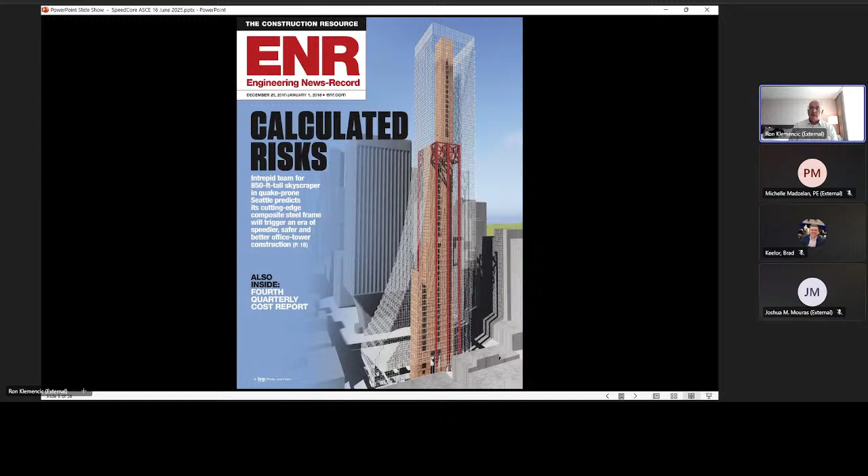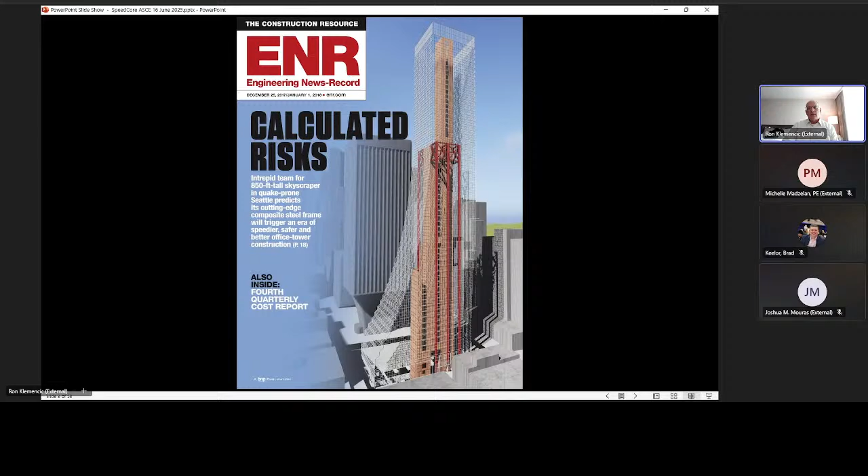So we came up with this idea of employing SpeedCore, a system never done before, never executed on a building before, especially at this scale. Engineering News Record got wind of that and wrote a very interesting article about new technology adoption in the AEC space and how reluctant we all are to adopt those things, entitled Calculated Risks.

The participants in this project: our ultimate client was Wright Runstad, the developer, who is a very prolific, highly regarded developer in Seattle. They've done many of Seattle's best buildings. NBBJ was the architect, and of course we were the engineers, and Lease Crutcher Lewis was the contractor.

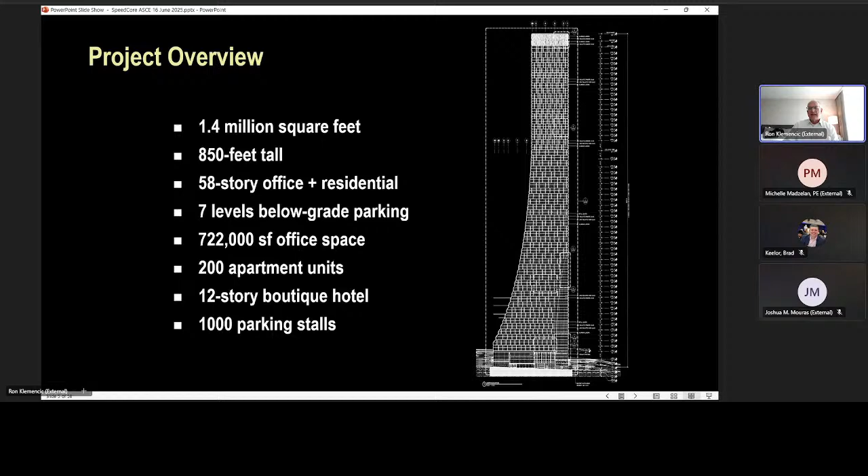Here's some of the stats about the building. What you'll note about the image on the right is it's a very slender tower, 850 feet tall, and what's not shown clearly here is we have, in addition, 7 levels below grade for 1,000 parking stalls. So it's a very massive building, taking up about 3/4 of a city block in downtown Seattle.

As I mentioned, the structural design was originally conceived as a reinforced concrete core. Here you see it colored in red. A very traditional core arrangement, the core in this case being 40 feet wide and 90 feet long, so 3 cells, 40 by 30, at its base.

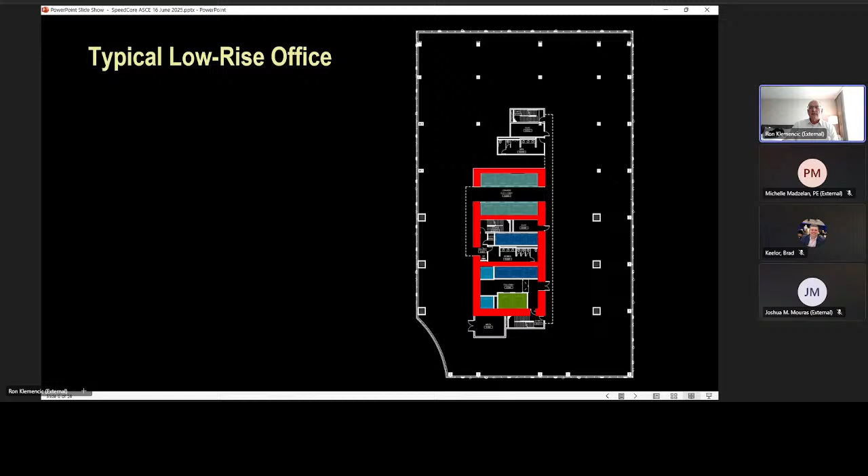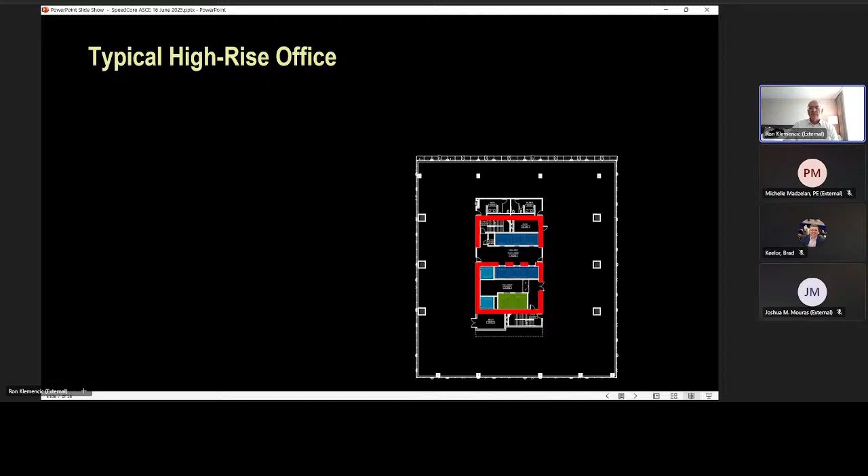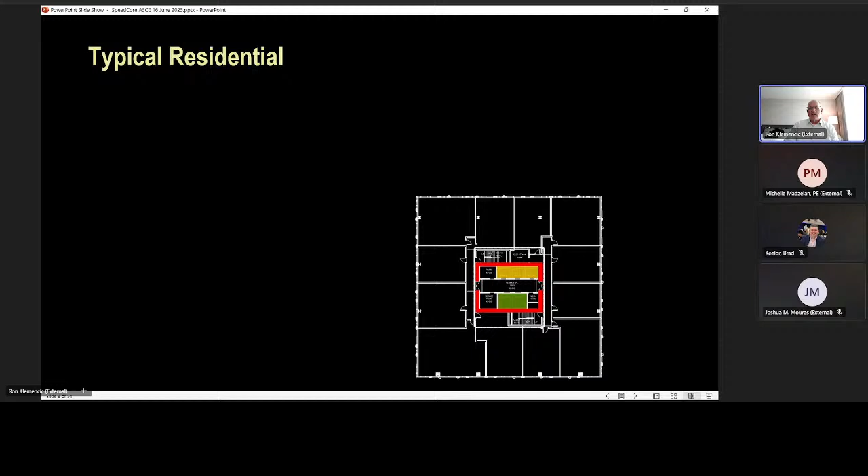As the tower goes up, the tower footprint gets smaller, and so also shrinks the core. Midway up the building, we're at 40 feet by 60 feet. And at the very top, where there are residential apartments, the core is reduced down to 40 feet by 30 feet. That's a very traditional layout for a structural bracing system for a tower of this height.

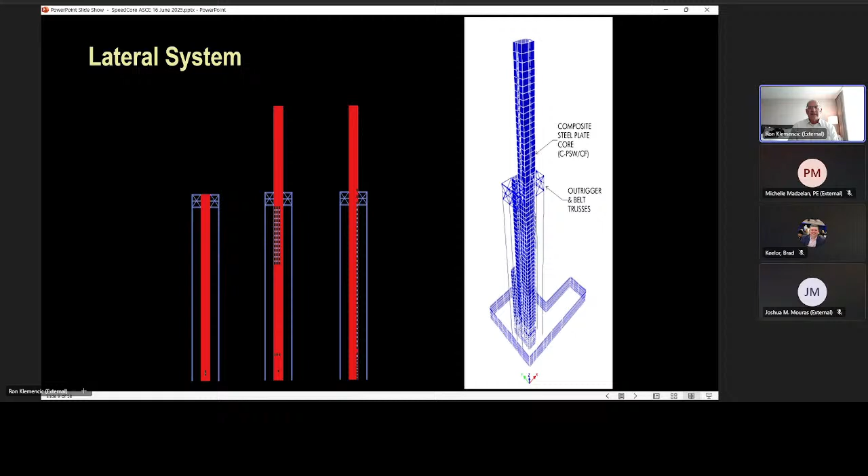But in addition, because of its slenderness, this tower also required a series of outrigger trusses and belt trusses located at a mechanical floor about 2/3 of the way up the building. In the case of Rainier Square, this mechanical floor delineated the differentiation between the office uses below and the residential uses above, so it was a very convenient place to locate these outriggers. That was the system originally conceived.

So the steel would overtake the reinforced concrete core very rapidly if the core is not well ahead of the steel erection. This was, in effect, the problem statement for us as we imagined another way to design and build the building: how can we squeeze this time lag out of the construction process? In the case of Rainier Square, that time lag was substantial, measured in months.

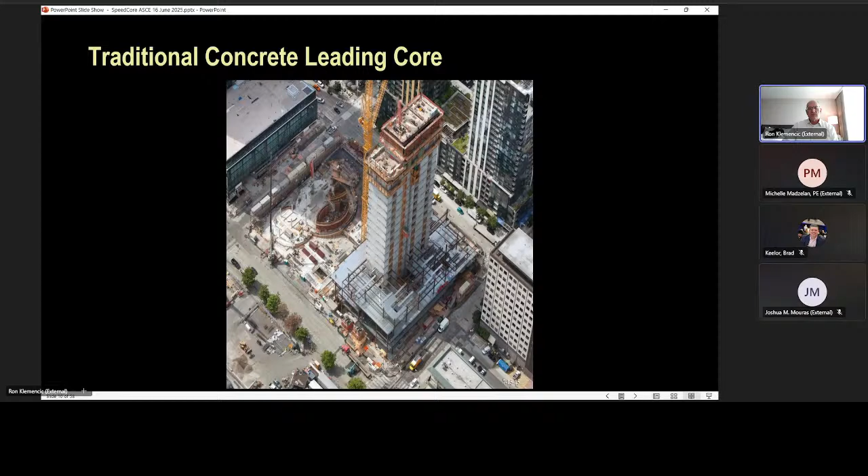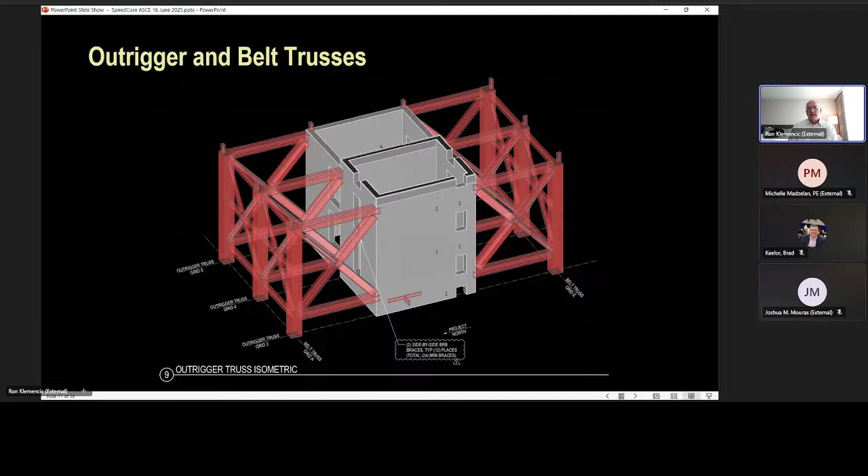Complicating it further were these mid-height mechanical floors with the outrigger trusses and belt trusses. The connectivity between those trusses back to the reinforced concrete core wall is very complicated, requiring very huge embedded steel shapes within the reinforced concrete, making that portion of construction very laborious, very costly, and slowing things down tremendously just at the 2/3 height of the building. So it was a further complicating factor.

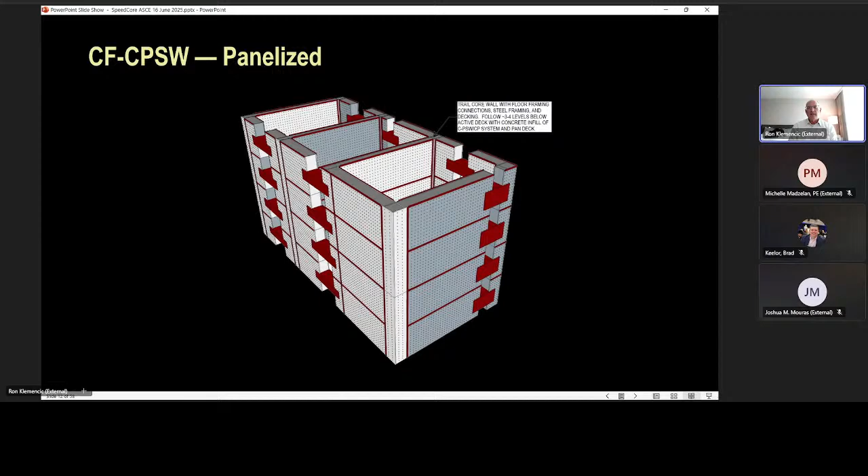That's where we introduced the idea of what was then called a concrete-filled composite plate shear wall, CFCPSW for short. Now, as AISC has named it, SpeedCore. Essentially it's a panelized, prefabricated steel sandwich panel that's prefabricated in a shop, trucked to the site, erected like giant Lego blocks, and then infilled with concrete in a trailing operation.

A typical panel looks something like this, where it's 1 story tall—in the case of Rainier Square, that being 14 feet—and 1 bay long, 30 feet to 40 feet long. So a typical rectangular panel looks something like this.

All the dots you see on the face of the steel plate are cross tie rods that interconnect the 2 steel face plates, and they serve many purposes. First, they serve as the stability for the prefabricated panel. Next, they resist the hydrostatic pressure of the concrete placed inside. Thirdly, they invoke composite action between the steel and the concrete. And lastly, they provide a confining pressure for the concrete under compression.

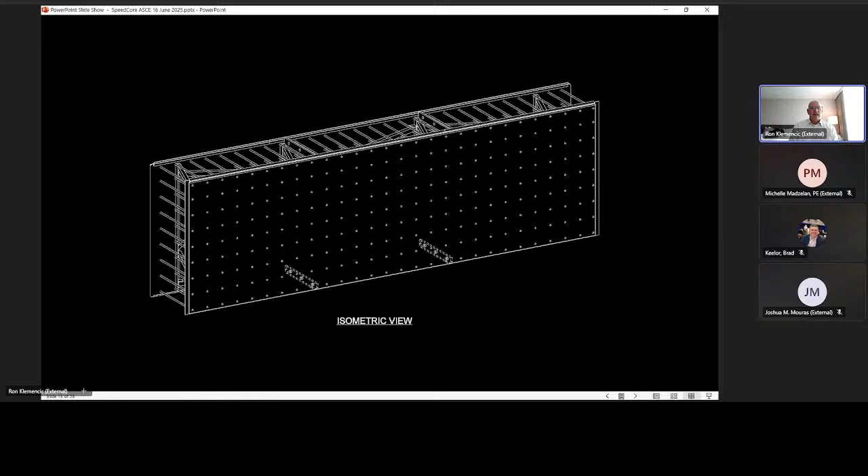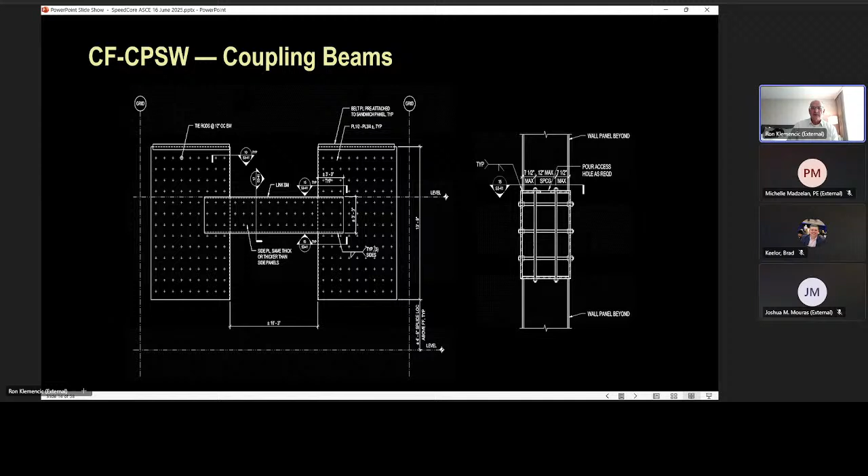These cross tie rods are very important to the overall system. There was a second type of typical panel we called the dog bone panel, or H-shaped panel, in which case typical coupling beams or link beams were also prefabricated in the shop to make these panels easily erected and to keep the detailed fabrication and assembly of the link beams in the shop and out of the field. That helped speed along construction.

The other detail that's really critical in thinking about this assembly is shown best in the right-hand image: the lower panel and upper panel are connected in the field, in this case with a weld, a multi-pass weld, which is a partial penetration weld with a reinforcing fillet. The design criteria for this weld was to develop the full tensile strength of the plate, since we were dealing with seismic forces and wanted to ensure that the connection itself was not the point of failure, but that any failure would be pushed into the plate itself. This is what was employed on the project.

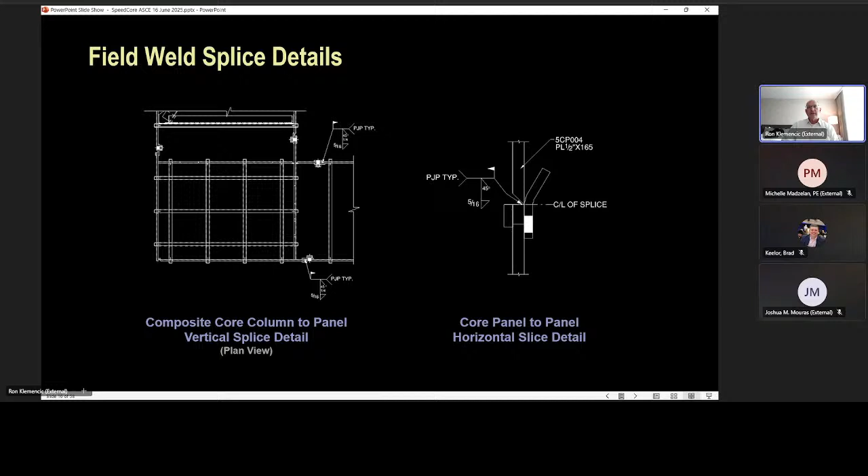We did provide the steel erector with a choice here. This is a system where you're able to bolt the field splices from panel to panel, or weld, and that choice was given to the erector. In the case of Rainier Square, the erector elected to go with welding, mainly due to the fact that they thought they'd have more flexibility and an easier time with fit-up in the field. Those are the two most critical details.

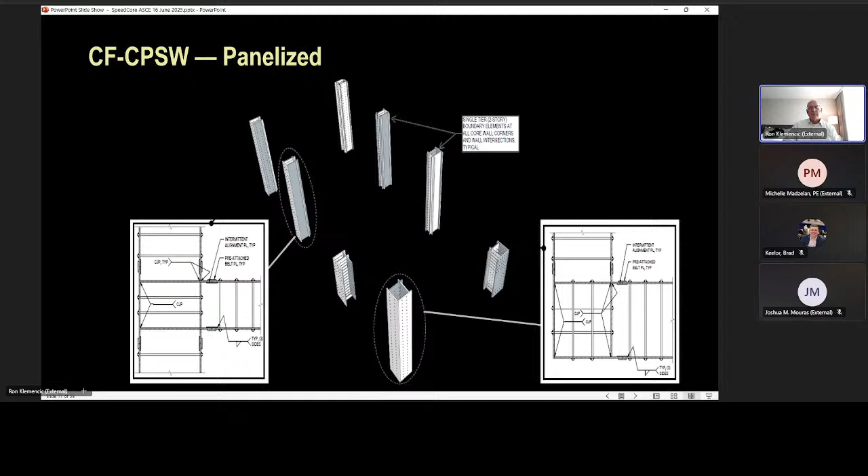There are plenty of others to think about. The erector was key in plotting out the strategy to put this together, and the erector brought to the table the idea of prefabricating corner columns, box shapes if you will, that were two stories tall, because erecting two-story tall box columns is something they've commonly done. They feel they can handle them readily, can plumb and true them easily, and then use those eight box columns as a framework to fly the very large wall panels in and use them more as a template. This was the strategy developed by the erector, which we then employed in the design.

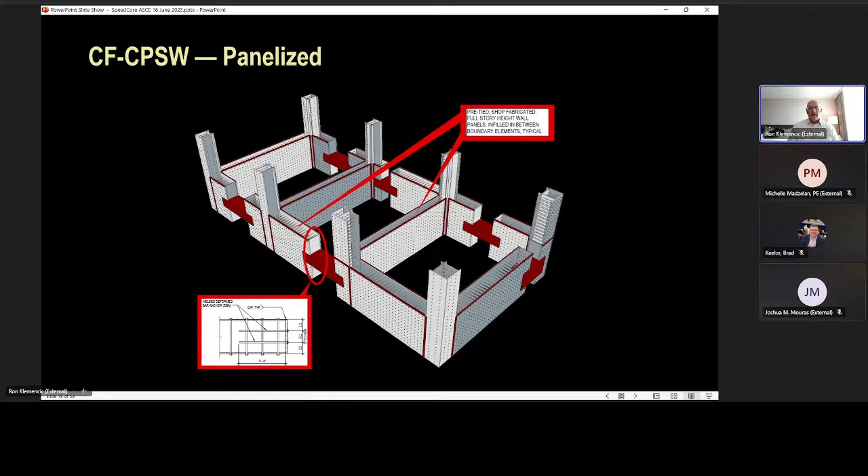Here's a bit of how it looks as it goes together. The eight box columns you see, and then the different panel types, both with and without the coupling beams, the red colored pieces being those coupling beams. The coupling beams in this image look like they're in an odd location, but if you can imagine, they are in the typical location at the head of a wall opening. The field splice was located approximately four feet above the top of deck, making it very easy for the steel erectors to make that field splice at hip height as opposed to overhead or at foot level.

I'll back up a step or two. About 10 years before we started the design of Rainier Square, a research project was undertaken, led by Purdue University, but funded by the Charles Pankow Foundation and the Magnusson Klemencic Associates Foundation. We first started working with Professors Bowman and Kreger in the Bowen Lab at Purdue University to test this assembly of prefabricated panels under a variety of loading conditions.

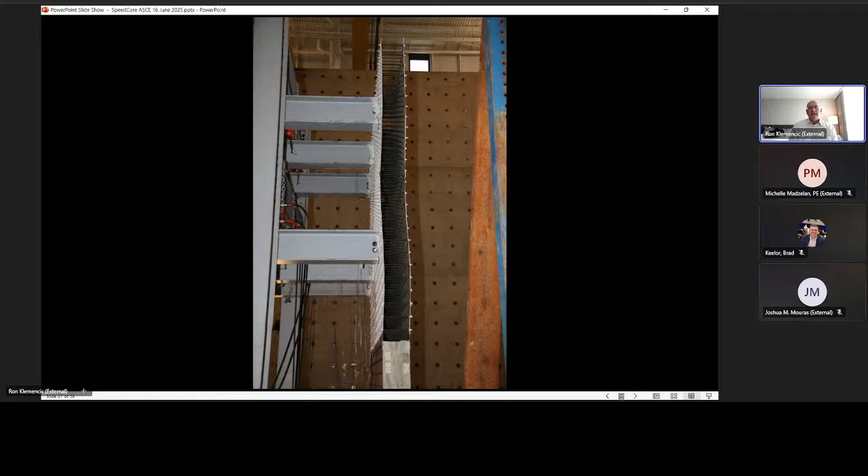In this image, you see a 5-story tall T-shaped section filled with concrete that was then tested for seismic loading. But we went through a whole series of tests, not only of the concreted panels for seismic loading, but in this case, an unconcreted panel, seeking to understand how much load we can put on this panel before we must put concrete in it.

The idea was to erect the panels quickly, speeding construction along as rapidly as possible, and only place the concrete inside of it when necessary. So understanding how much temporary load these panels could take was very critical in terms of realizing the time savings.

Here, if you're looking carefully, you can see the wall panel has actually buckled, and that was the point of this test: to understand when we achieve or initiate buckling in the wall panel due to applied load. This sets limits on the design of the panel and how far behind the concreting operation it can trail.

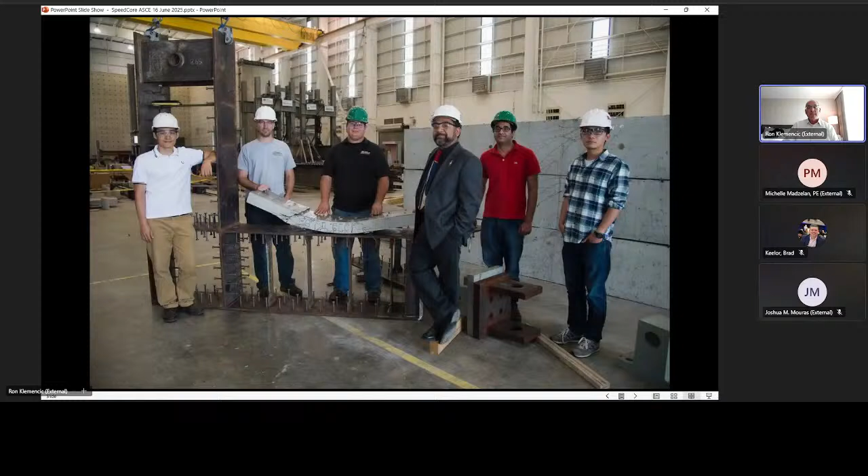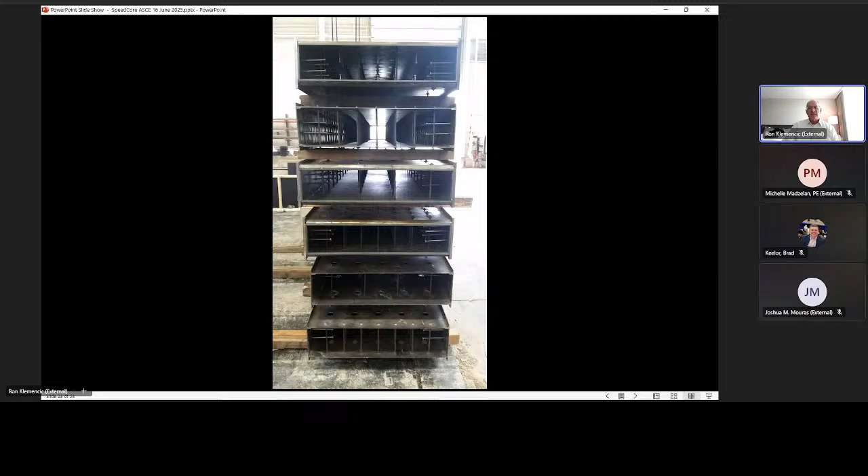A few years later, we extended our research work at Purdue University with Amit Varma and his team, looking at a variety of other details of this assembly—in this case, different ways to connect the cross tie rods and what those cross ties are made out of. Are they in fact cross ties, headed studs, or some combination thereof? We tested numerous configurations of panel assemblies.

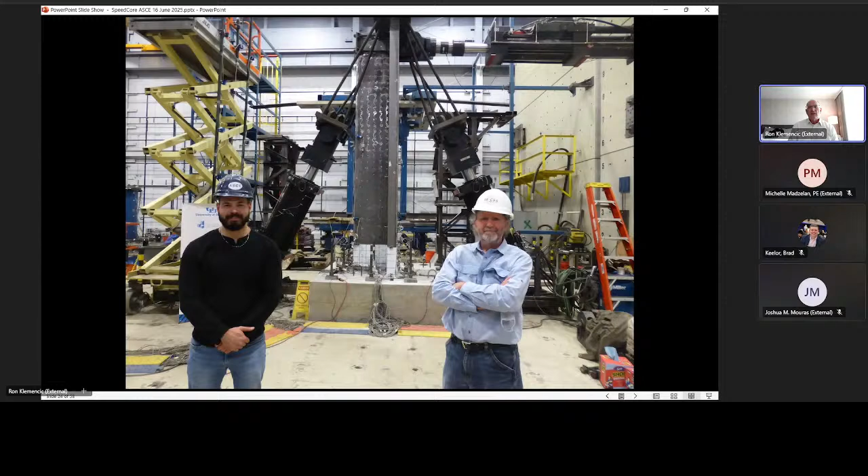In parallel, we had a separate team at SUNY Buffalo, led by Michel Bruneau and his team, looking at a variety of other conditions on these wall panels. In the background you see a T-shaped wall that was subjected to biaxial bending.

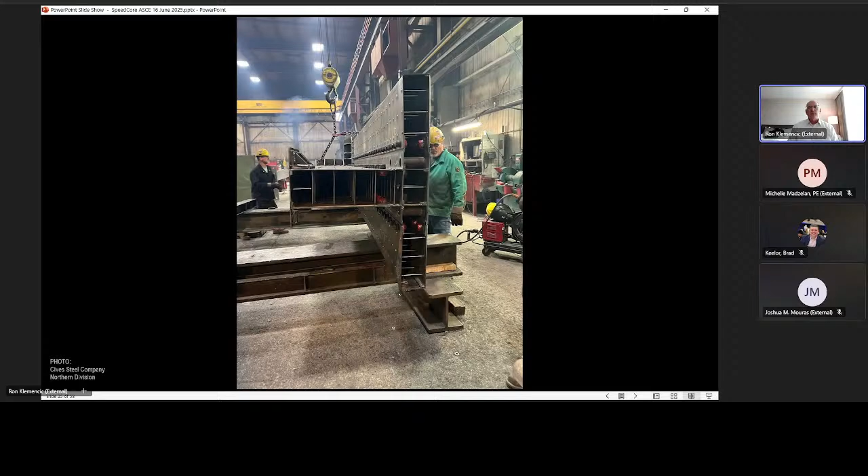In addition, Michel Bruneau's team at Buffalo tested bolted field splices. Here you see, leaning on its side, a T-shaped section with bolted splices. We were also testing the ability to bolt these splices, in addition to welding them, to prove out a variety of bolting methods.

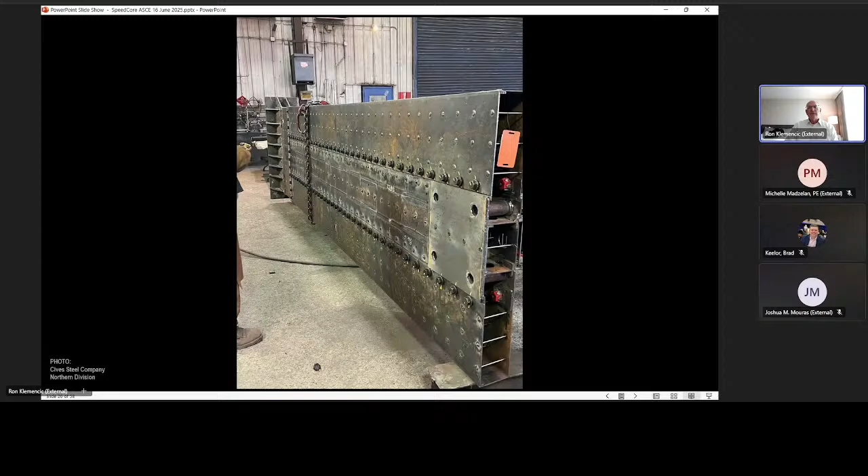Complementing all this in-laboratory research, which started some 10 years before we actually designed Rainier Square, when we got to the design, we—the owner, the constructors, the erectors, all the project participants—felt it would be really useful to build a full-scale mock-up of a portion of the core to understand how to go about building it prior to game time.

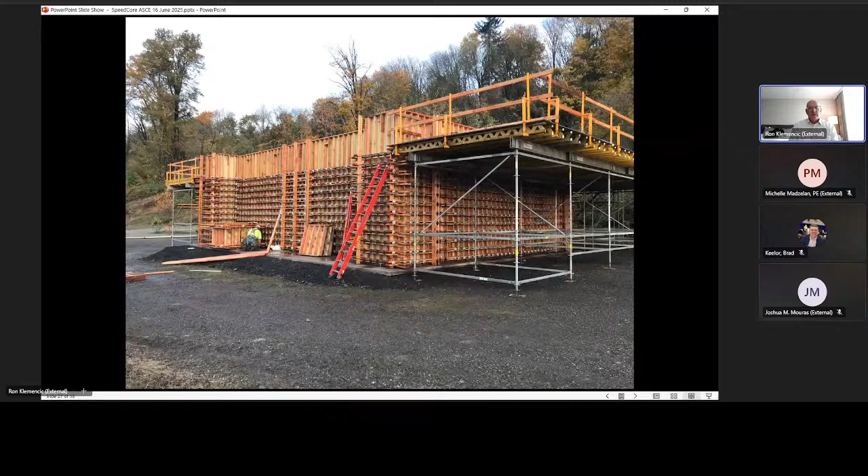So here you see a full-scale mock-up of a portion of the core, made of wood formwork with plastic cross ties made of PVC, mimicking the geometry of the wall section. The primary purpose of this mock-up was to understand the performance of the concrete mix design we had been experimenting with. We wanted a mix that was easily pumpable, easily placeable, and that flowed around the section so we only needed to place concrete through a limited number of placement ports.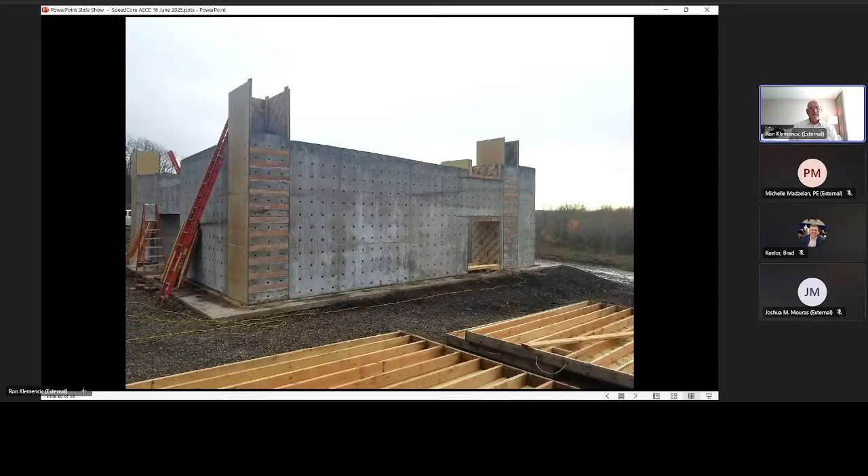After the concreting operation in this mock-up, we were able to strip the wooden formwork away from the concrete to make sure we had adequate coverage and that there wasn't serious segregation or cavitation anywhere. We were pleased to find that the concrete mix design performed very, very well.

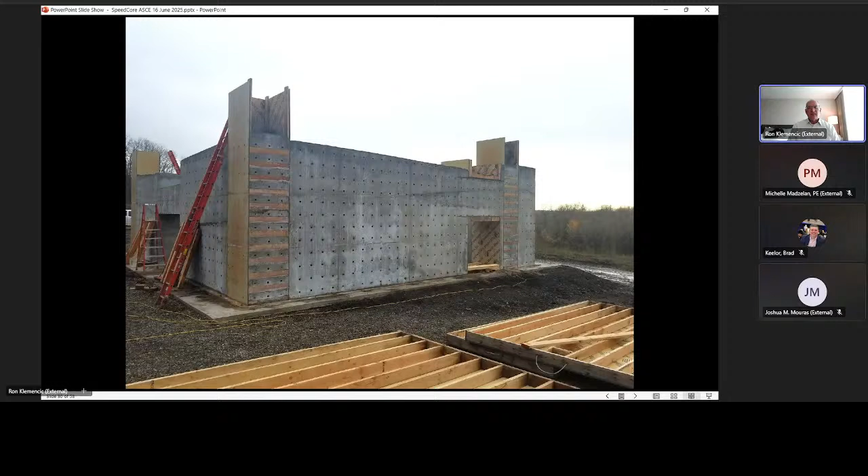In addition, in this mock-up we did all the normal engineering tests, including compressive strength, modulus of elasticity, heat of hydration, shrinkage, etc., to make sure we understood all the properties of this particular mix and how it would perform in the wall section.

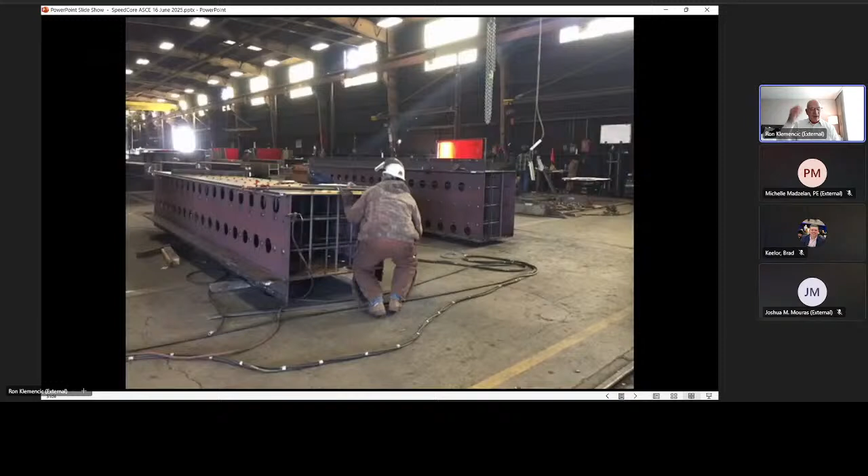In addition to the concrete mock-up, a full-scale steel mock-up was also built of a corner of the core. That mock-up was built, as were all the panels, in a shop in Portland, Oregon. Here you see one of the full-scale corner columns being fabricated.

The Swiss cheese holes you see in the left-hand plate are flow holes to allow the concrete to flow inside the wall and around the corner. You also see a good image of the cross tie rods in those four-foot square box columns.

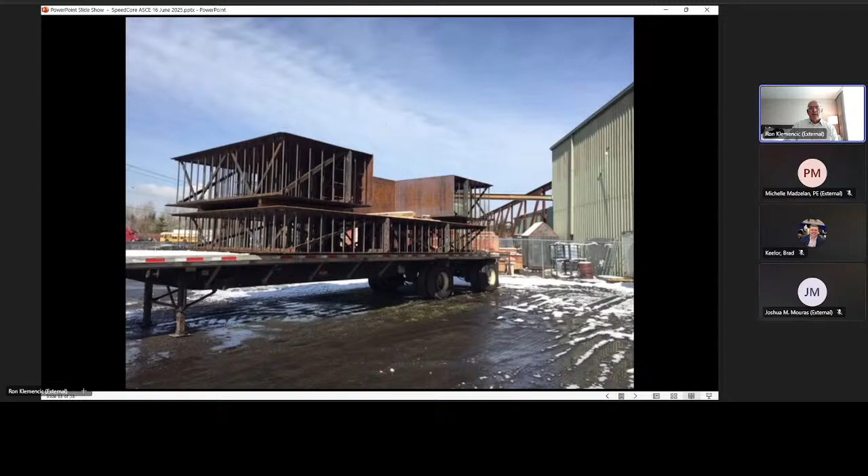All of the modules were put on a truck in Portland and shipped up to Seattle. In this case, you see some mechanical penetrations that were prefabricated into the wall panels.

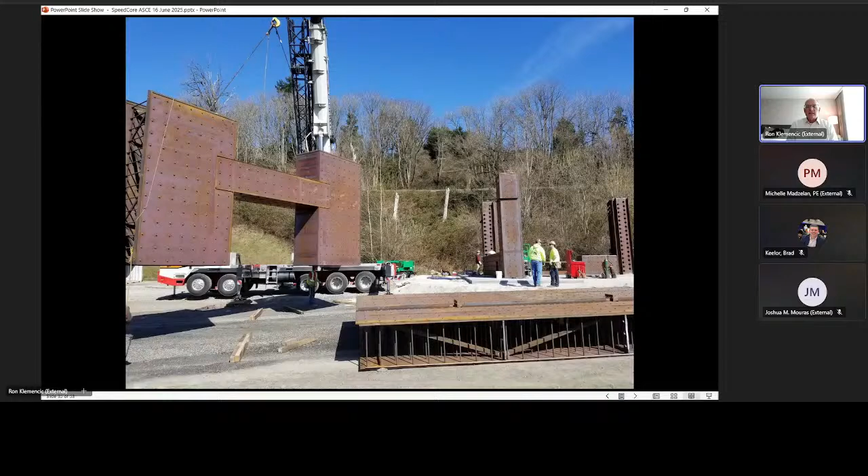Then the erection team had a chance to practice, off in a yard in Seattle, experimenting with how to pick these very large panels off the truck. They weighed in the range of 9 to 10 tons each. How do we handle them in the wind? How do we move them into place? And ultimately, how do we lower them down and get them plumb and true in the field?

You get a pretty good feel for the scale of this operation with the people standing in the foreground—these panels are quite massive, including the corner columns—but handling them actually went very, very well.

A number of lessons were learned through both the concrete mock-up and the steel mock-up. For example, in the next image it'll be more clear.

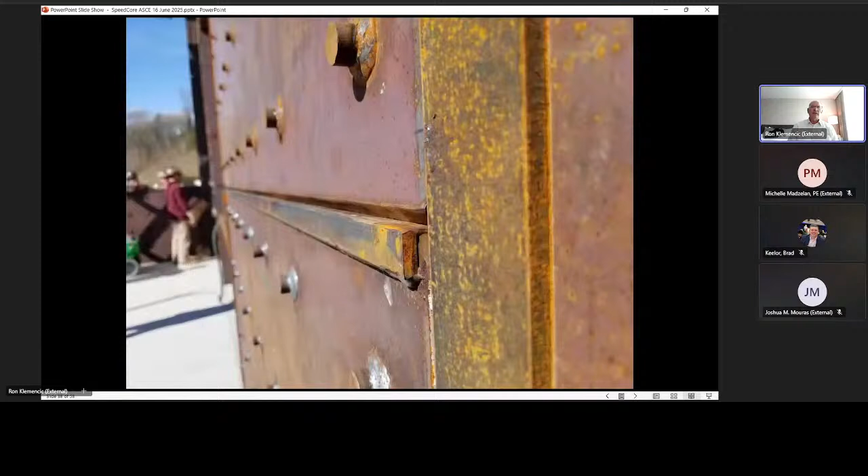Here you see a field splice that's yet to be welded. Note that the cross tie rods are shown equidistant above and below that splice. What we learned from this mock-up was that a better strategy may in fact be to offset that from equal to 25%, 75% on the spacing. The reason being, with that longer tongue on one end—in our case the upper panel, the longer free edge of the plate—it allowed greater flexibility and adjustment in the field for the plate-to-plate splice.

That's as opposed to the equal spacing of the cross ties you see here. It was a seemingly small adjustment, but very important to enabling the erectors to achieve the speed and field fit up that they hoped for.

Also, in this image, back to the field splice, we experimented with semi-automated welding. I stopped short of calling it robotic welding because it wasn't really a robot, but it was an automated welder, and also hand welding. What was learned from that experiment was that the automated welding in the field doesn't do well. There are two issues primarily.

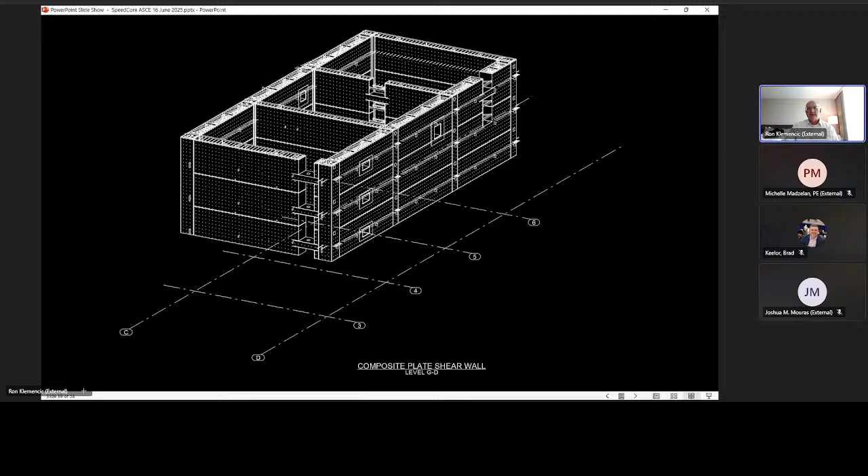After all of this testing in the laboratory and experimentation with mock-ups, it was kind of game time. Here we started the shop drawing process—a typical process, detailing out all of the various panels. Here you see, once again, a typical rectangular panel, nominally 14 feet tall, nominally 30 to 40 feet long, inclusive in this case of a large penetration for a mechanical duct.

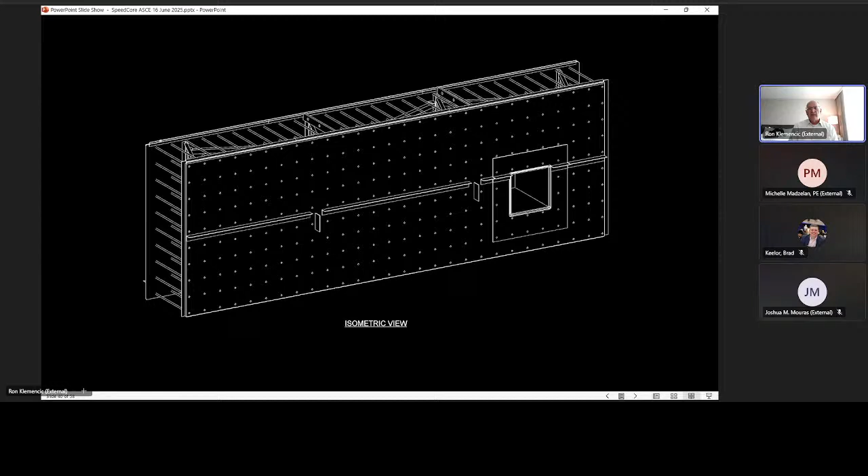Also inclusive of the deck ledger angle for the incoming metal deck that would be supported by the wall, and the shear tabs for the incoming steel beams that would be connected to the wall. All of those pieces were shop fabricated such that when this panel was erected in the field, it was ready to receive anything and everything that was attached to it.

Similarly, the H-shaped panels went through a similar process, prefabricating the link beams in the shop and getting ready for concreting in the field. But once again, you see the deck ledger angle, the shear tabs in place, as well as the upper plates and side plates for the link beams.

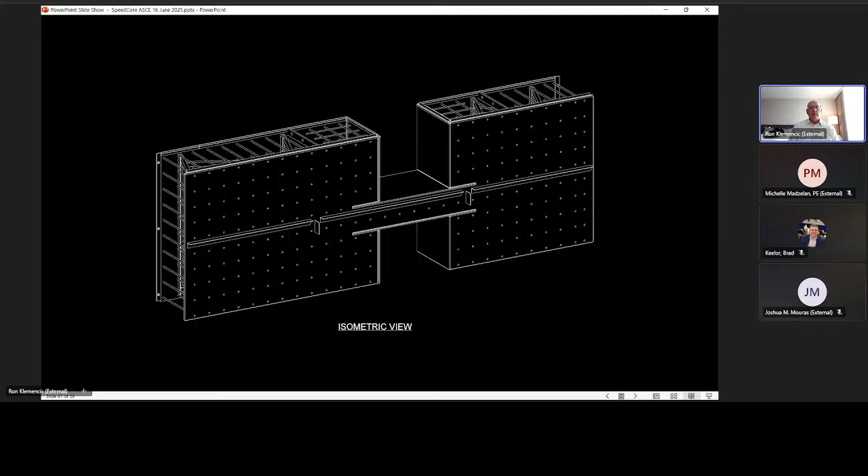In some of these images you can see it faintly, in between the panels, in addition to the cross ties, hints of a few diagonal members. In the larger panels, nearly 3.5 feet in width, the erectors and fabricators felt that some supplemental trussing or bracing inside the panel for handling and erection was critical. So that was added into the panel fabrication—not really part of the structural design, more so to stabilize the panel during fabrication, shipping, and erection.

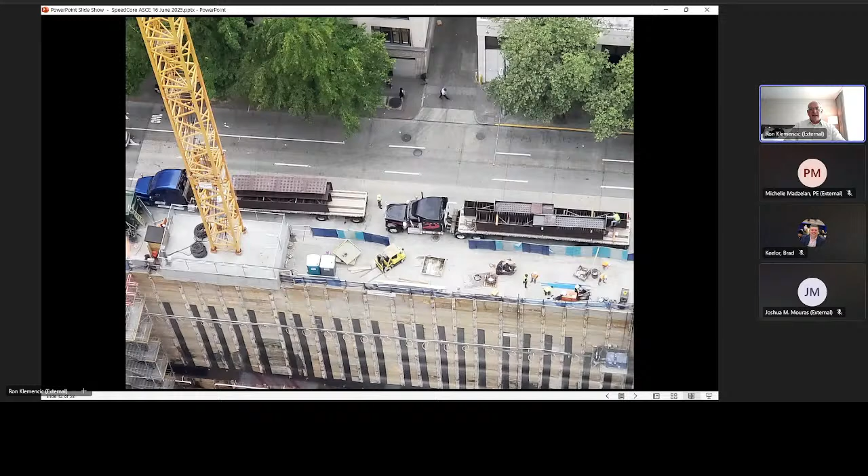Ultimately, the panels showed up on site. Here you see the first load of panels arriving on site. I had the personal vantage point of looking out my office window on the 32nd floor every day, down into the hole, into the site, and seeing these sights. This particular photograph was actually taken from my desk—a unique opportunity to witness one of our designs every day right outside my window.

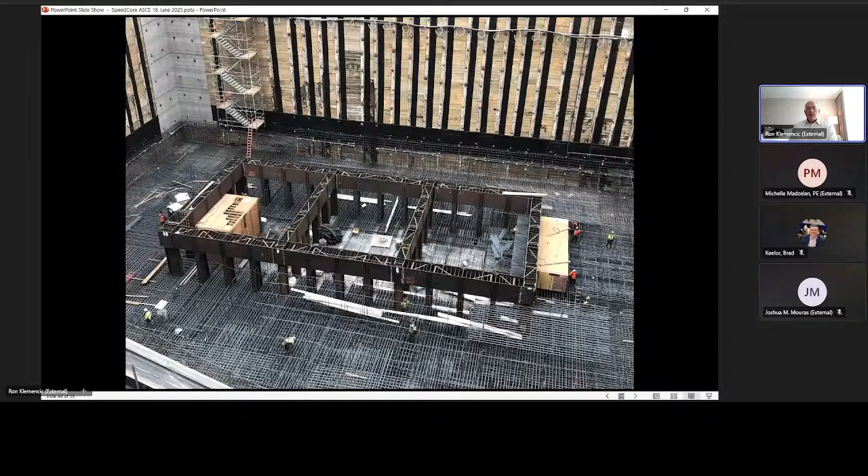So here's the lower panels being lowered into the hole and the connection to the foundation. The connection to the foundation in this case was a source of great discussion with the contractors, the fabricators, the erectors, and the rebar placers.

The foundation in this building is a mat foundation, 12 feet thick. We have very good bearing in downtown Seattle, so we don't require piling for most of our buildings downtown—most sit on shallow foundations or mat foundations. The question was how to connect this set of wall panels to that mat foundation.

In the end, for Rainier Square, the detail that was adopted was where stanchions or columns were placed along with the first lift of wall panel, and all of that assembly was made true and plumb and very precise, making sure it was situated in exactly the right location as we launched the rest of the wall construction going upwards.

This operation was handled with great precision, using lasers to ensure it was in the right position before the rebar was completed for the upper layers of the mat and before the mat concreting was completed. After the mat concreting was completed, we were ready to go.

Here's a shot looking down from my office at day one of steel erection. We've got the mat poured, the starting blocks for the SpeedCore wall are in place, and we're ready to begin steel erection. As a side note, this building has 7 basements for parking, a very deep excavation, 100 feet deep in fact. Originally the basements were designed as a reinforced concrete structure. When we switched to the SpeedCore system, that decision was reevaluated and ultimately changed the design of the below-grade structure from reinforced concrete to structural steel. The additional excavation for the required added floor-to-floor height was offset and then some by the speed of erection coming out of the hole. So an evaluation was done, and ultimately the decision was made to move forward with steel erection starting off the top of the mat, inclusive of the below-grade garage.

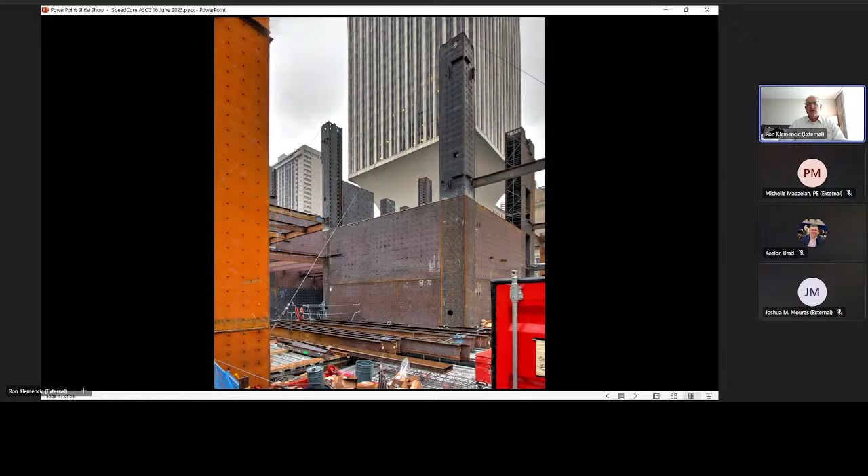This image gives a good idea of how the erection proceeded. You see the 2-story tall box column standing up, and some of the wall panels inserted. If you look closely at the corner column, both at its base and a couple of times up its height, you see a circular hole. That is a placing port into which the concrete pump was inserted to place the concrete. There was a placing port located in each of the 8 corner columns, allowing us to insert the pump and place concrete into the wall assembly at each location, and then allow it to flow through the remainder of the wall. It proved to be a very successful strategy.

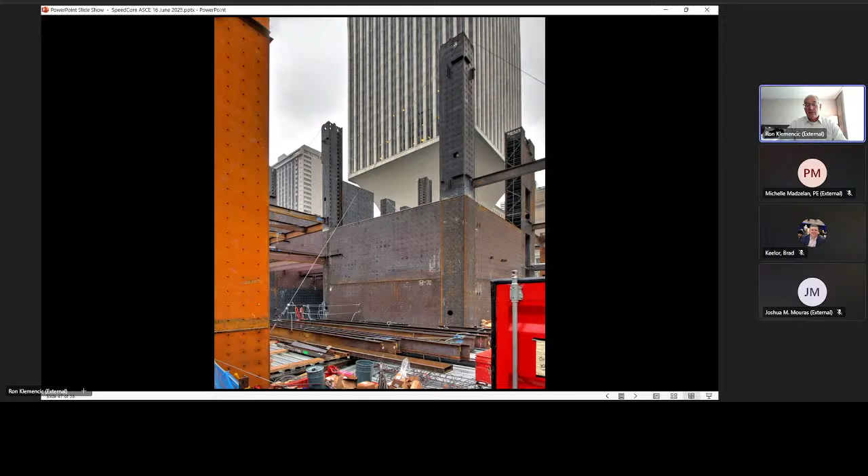The concrete was placed one floor at a time in a downward fashion, so the concrete was allowed to free fall 14 feet. This was proven fine in our mock-up, noting that the ultimate mix design used in this project did not include any coarse aggregate—only sand, cement, water, and some admixtures. It was more of a grout than a concrete, which prevented the segregation question from being a particularly worrisome issue.

Up went the erection. We're getting close to the level of my personal office. You can see how closely the core wall and the steel erection are aligned with one another, compared to the image I showed earlier, where the reinforced concrete core was well ahead of the rest of the steel erection. This allowed the steel erection team to work very rapidly.

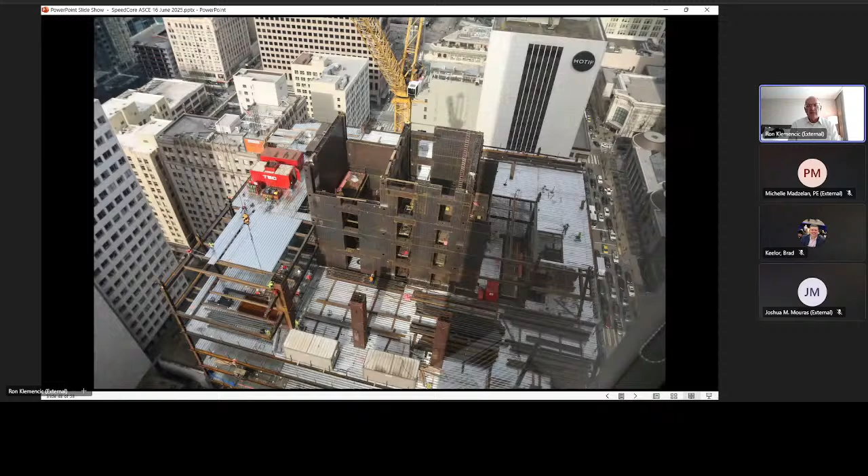At the peak of speed on this project, they were erecting 4 floors per week. It was a very rapid erection once we got up, in particular to the upper portions of the building with a smaller core and a smaller floor.

A close-up of the core, once again showing the placing ports where concrete would be inserted. If you look very closely at the tops of the link beams, you'll see a small hole there as well—we'll call it a blow hole. The idea was to enable us to ensure we had full coverage, or fully filled link beams. When we knew the concrete was coming out of the top of the link beam through those holes, we knew we had placed enough concrete inside the overall wall section and that the link beam was indeed full of concrete.

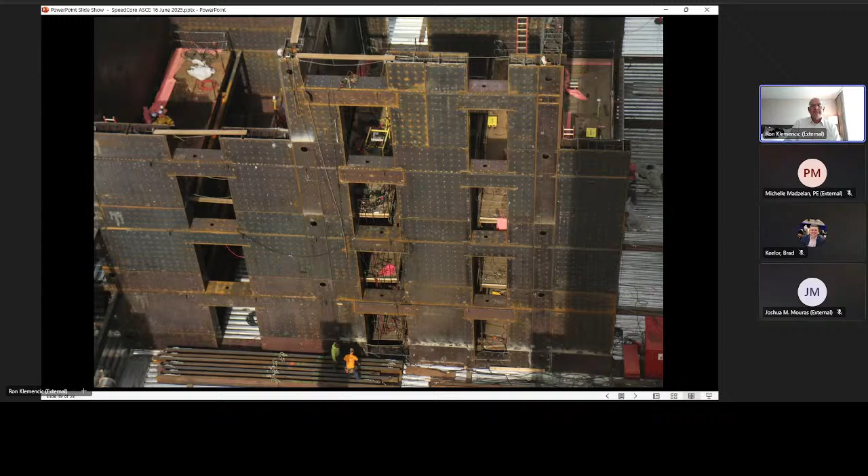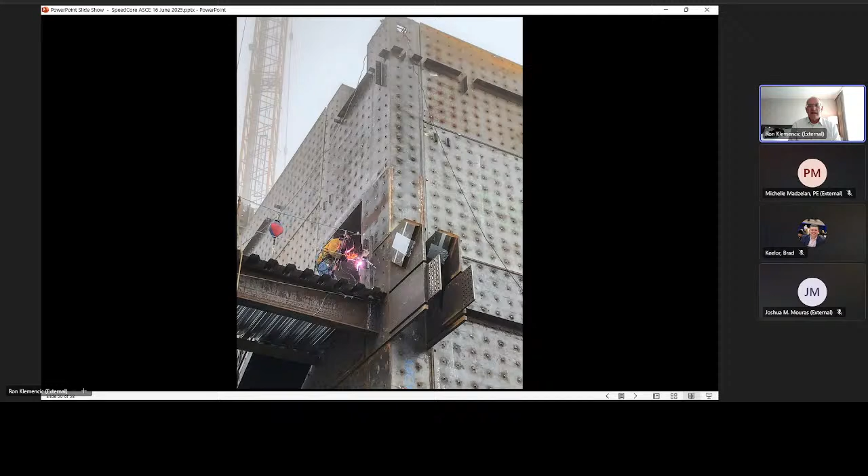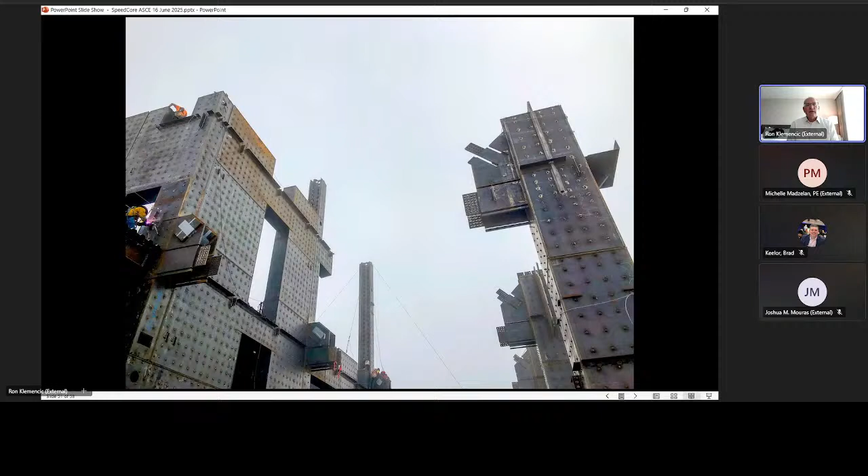Also shop-fabricated were the steel connections for the outriggers. This saved a tremendous amount of time and field headaches, not having to do that work in the field as would typically be done in a reinforced concrete building. All these very complex, very heavy connections between the core walls and the outrigger trusses were made in the shop. In addition, the connections to the outrigger columns, shown here on the right-hand side, were also prefabricated, along with the columns themselves.

I should mention that the outrigger columns were made of the same type of construction. They were 5 feet by 5 feet square, half-inch thick steel plate, with cross tie rods protruding through, spaced at 12 inches on center in a field in both directions.

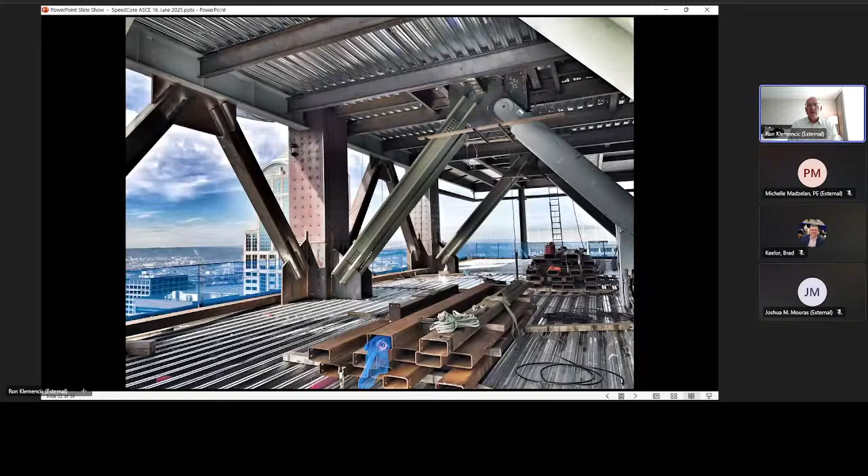This gives you an idea of what the outriggers looked like when they were completed—very heavy sections in the case of the outriggers themselves. The green shapes to the left were double wide flange sections, and the gray section to the right is a buckling restrained brace, used as a fuse for the overall seismic system so that we could control the amount of axial load ultimately delivered to the perimeter columns.

Ten months to the day that we started steel erection at the top of the mat to the day we placed the final roof beam on top of the building, the topping out party, if you will, was exactly ten months to the day.

From basement -7 to the top of the building, the uppermost occupied floor is level 58, and the roof is level 59. So 59 and 7 is 66 floors of steel construction erected in their entirety for the topping out ceremony in just 10 months—very, very rapid. You can also see in this slide that much of the skin is already on the building while we're topping out the steel at the roof.

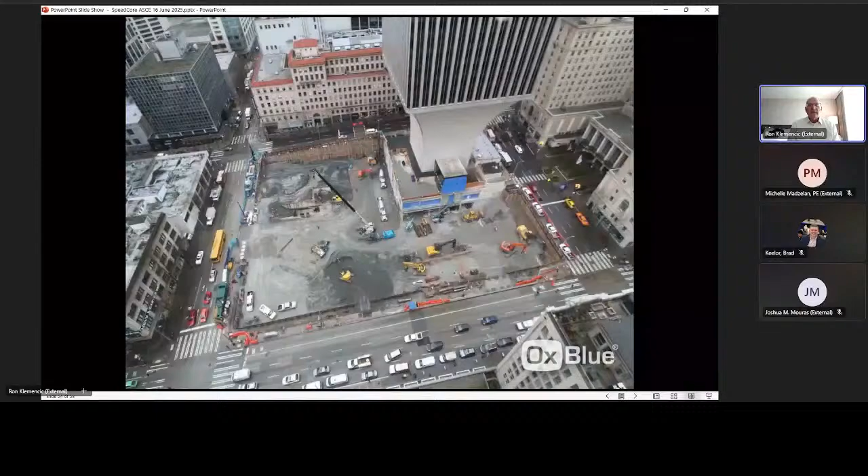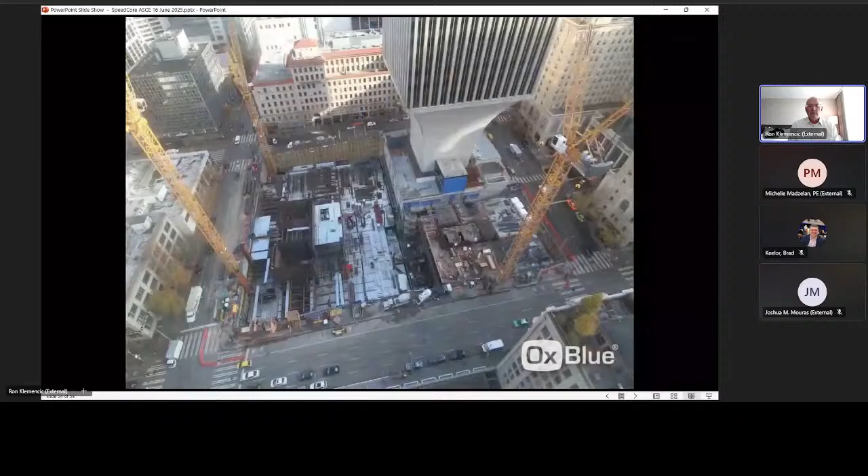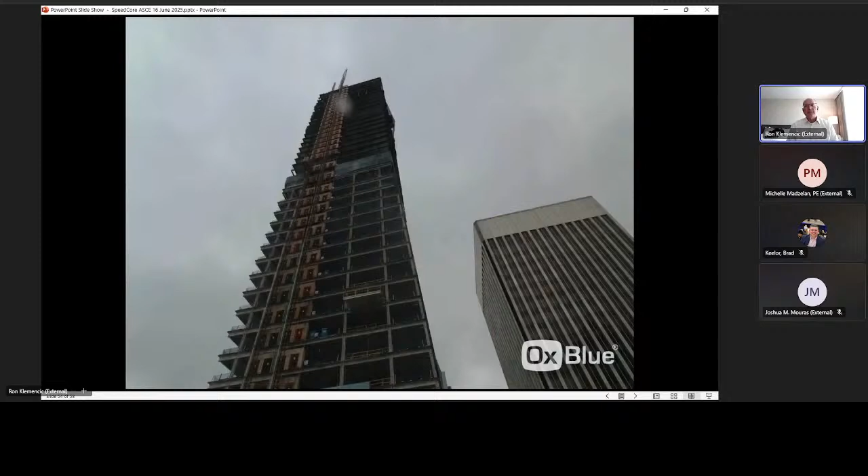Here we're going to see a brief time-lapse video that shows first the excavation being dug 100 feet deep, with a very precarious Rainier Tower sitting next to it. I had several months of anxiety as that hole was laid open, and then up went the building very rapidly. The time-lapse photography we had on the building across the street is all time-stamped, so we know precisely how long this took to build—it's a good record of what was accomplished.

From an overall construction point of view, the building was originally scheduled to take 32 months to complete, with the reinforced concrete core, the traditional design. The building was actually completed in 22 months, a savings of 10 months on the overall schedule, which for the client was a wonderful outcome—not only does that save a tremendous amount of money in contractors' general conditions and interest on construction loans, but it also allows them to start charging rent 10 months sooner. So it was a huge win for the client as well.

The building has been open and occupied now for a couple of years. It's a very beautiful building on the Seattle skyline—the second tallest building; the first tallest, off to the left, is Columbia Center, built in the 1980s. So this is the brand new addition to the Seattle skyline, a wonderfully beautiful project with all kinds of different qualities and colors throughout the day as the sun reflects off the uniquely designed skin that NBBJ designed.